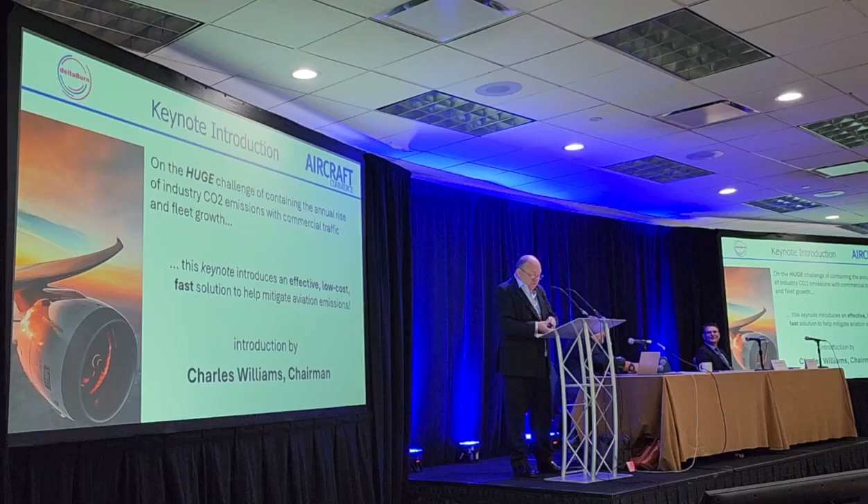I'll start off by saying the industry has a huge challenge ahead of it. As you're all aware, the industry continues to grow each year in proportion with the economy. The exception to that, of course, is when we get a big recession or downturn due to something like COVID, but generally the industry always recovers from that and continues on its trajectory.

Each year IATA produces a report, in about June, summarising what happened in the previous year. That summary includes the number of passengers boarded on commercial flights, the number of commercial flights performed, the fuel consumed, and consequently the CO2 produced.

If you look at the historical data that IATA produces, you'll see the average compound annual growth rate between 2004 and 2019 averages about 4.65%, which means it only takes 15 years for traffic, or passenger numbers, to more than double. And of course, with that, you get an increase in the size of the fleet, and an increase in the quantity of fuel consumed.

Just to summarise, in 2019 the industry consumed 96 billion gallons of kerosene, but that rose to 99 billion gallons in 2024, having recovered from COVID. For this year, the whole year is forecast to be 103 billion gallons, and of course that correlates to about 1.25 gigatons, or 1,229 million tons.

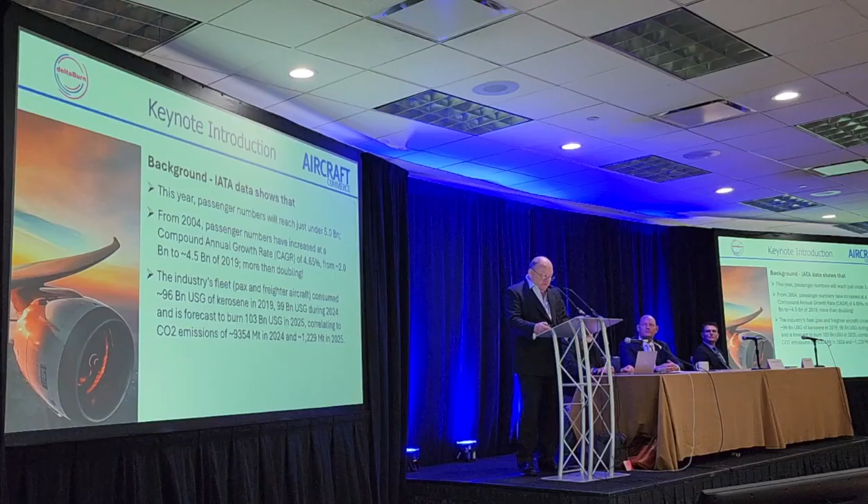Now, of course, the industry has to take its responsibility to get its CO2 emissions down. Under the Paris Accords, the industry's emissions are allowed to peak in 10 years' time, but then it's got to start declining again. The original target for 2050 was CO2 emissions of just 250 to 400 megatons, clearly a small fraction of what they are this year, and an even smaller fraction of what they're likely to be in 2035. However, in 2021, that target was changed to an absolute figure of zero, which many feel a bit cynical about being able to achieve.

The point here is, though, that the larger the peak we reach in 2035, the larger the annual reduction has to be each year for the next 15 years to 2050.

As I was saying, we have a conflict because already historically, since the industry began really in 1945-46, passenger numbers increase exponentially, as does the fuel consumed, as does the CO2 emissions emitted. Although we have had a continuous improvement in fuel burn efficiency because of the steady, continual modernisation of aircraft and the overall fleet.

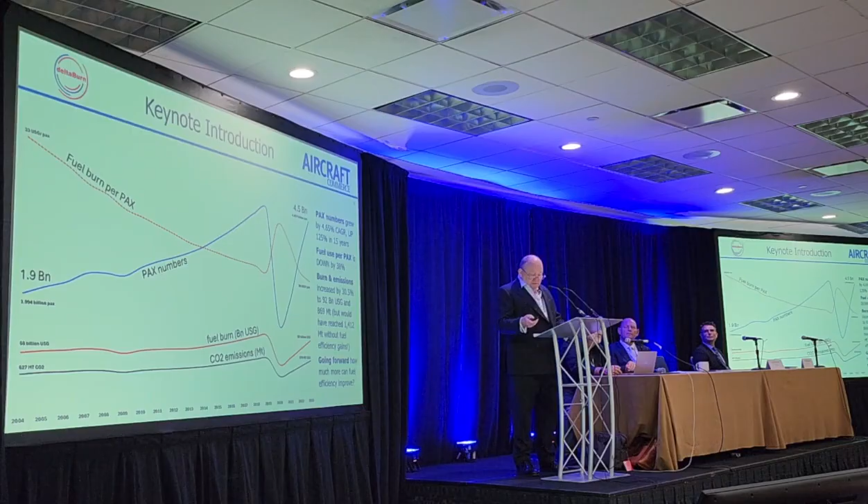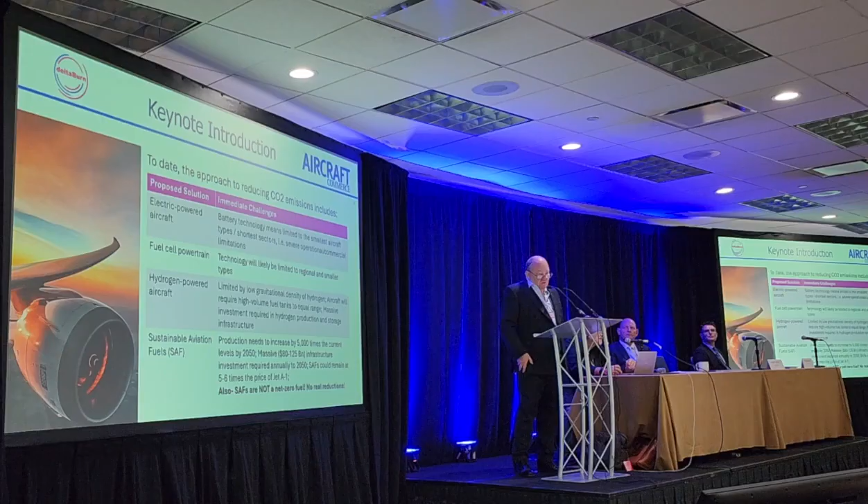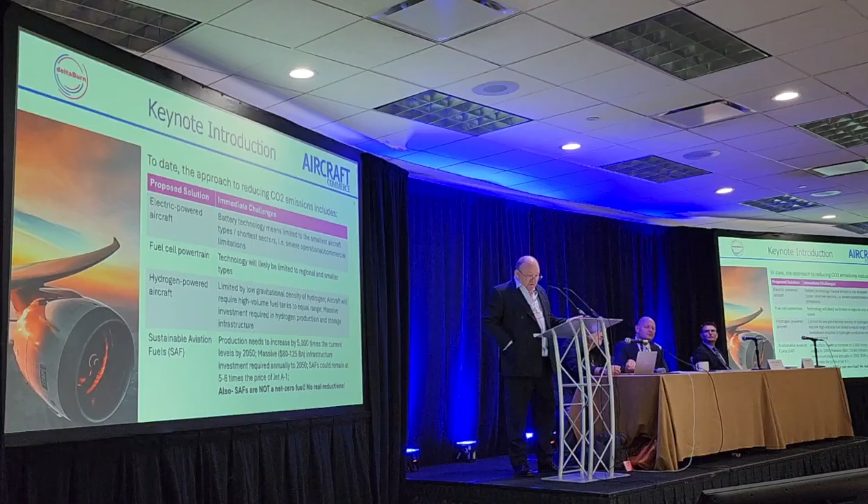Over the last 10 years, I've been at various conferences, spoken to lots of people, read lots of articles. There are all sorts of technologies that have been proposed to find an alternative fuel or propulsion system, or both. People talk about electric-powered aircraft, fuel cell powertrains, hydrogen, and so on. As time progresses, it seems more and more likely that the big winner is going to be sustainable aviation fuels. That seems to be the only real plausible option at the moment for passenger aircraft at 150 seats or bigger.

The problem is, of course, the production of SAF is starting from a very small base. As of 2 years ago, projections were that current 2023 levels of production would have to be increased by 5,000 times to meet the demand the industry would have for the entire fleet in 2050. That in turn requires up to $125 billion of investment in infrastructure to build all these different SAF plants, and then there's still the issue of source material and what the end fuel would cost compared to current Jet A1.

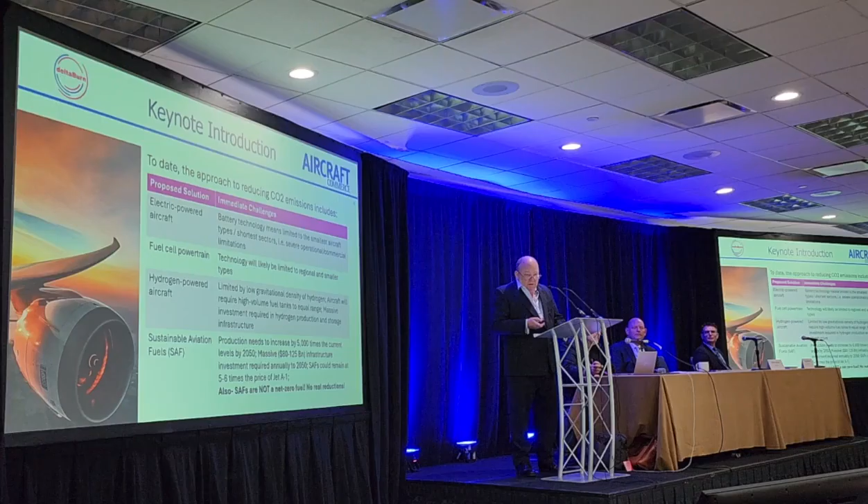Another factor, of course, is that not all SAFs are net zero anyway. So there are a lot of big question marks over reaching these targets by 2050.

So that brings us to deltaBurn, which Sander de Moor is going to go into a lot more detail on when I finish this slide. deltaBurn is providing a very simple technology via modification for current generation engines, which significantly reduces fuel burn and other cash DOCs. It also enhances the aircraft's operating performance and revenue generating capacity, and it can be applied to the aircraft in a very short time. It can be applied to all types of conventional propulsion, propellers and turbofan engine blades alike. It's also fuel type agnostic.

So Sander is now going to explain in far more detail the deltaBurn project. Sander.

So, you want to introduce yourself, Sander, or I can do it?

If you look in the notes on the website, it's very interesting. Sander de Moor is an investor, board member and general management of deltaBurn, a Singapore-based company. Sander brings, apart from a very big personality and lots of fun, 4 decades of flight operations support with roles across many aero company profiles, areas of operation, climates and cultures, and in most areas of flight and ground operations. So the last 2 decades brought all of that together in deep airline fuel and operational efficiency expertise. So Sander is managing this exciting startup, which he's about to tell you about, with significant fuel burn reductions and emissions improvements. So Sander, over to you.

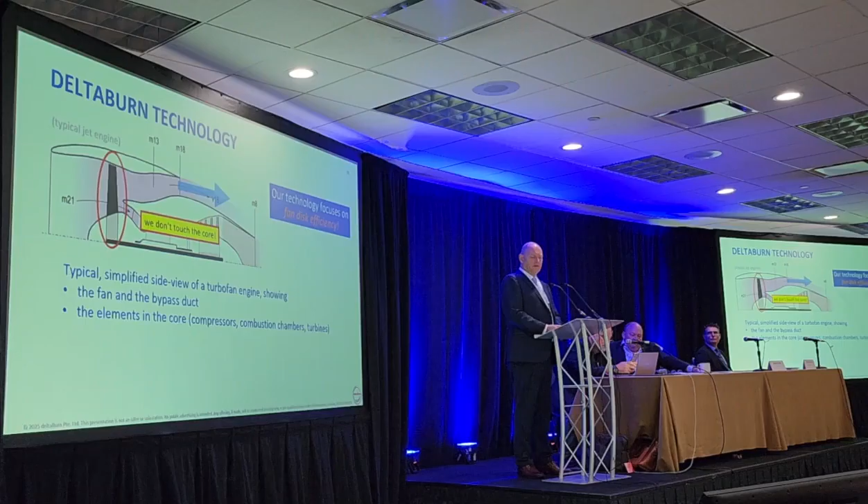Our technology purely focuses on the fan disc itself, the propulsion disc. So we increase the efficiency of that disc. Now, how we do that is still a little bit under wraps, but what we do is we drastically change the airflow around the fan blades. And in doing so, we create some really interesting secondary effects, which result in much more mass flow through the bypass duct and a lot more exhaust velocity. And this is signified by the larger blue arrow.

Now what that means is, because we have more mass flow and more exhaust velocity, because we changed the fan, we have a lot more thrust. So now your 32,000 pound engine is producing a lot more thrust, which on the face of it is a great idea, except the bearings in the engine don't like it that much, and possibly the engine pylons don't like it that much if you start to pull a lot more.

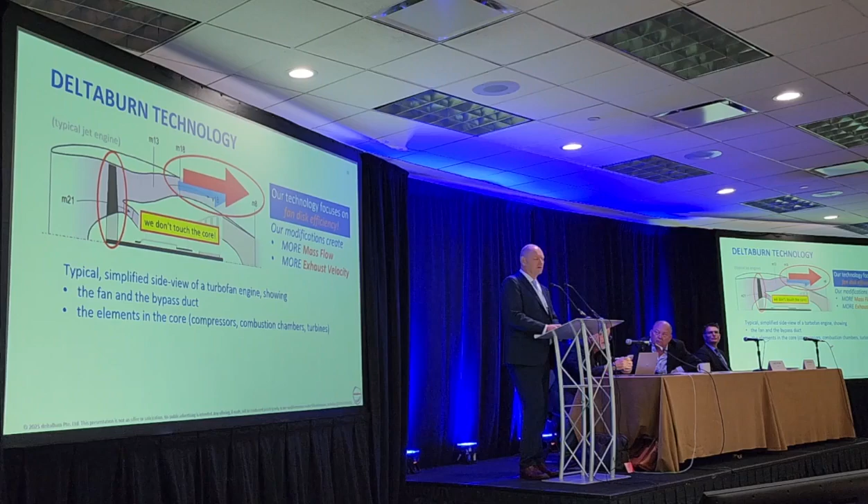So what this actually means is, if you power back a bit, you can actually fly with the same thrust, but now at a lot lower fuel burn. And that's actually what we're doing. That's the trick. We make the fan more efficient, we get more bypass flow, and because of that we can bring the power back and get the same thrust with less fuel burn. Now, there is a whole string of benefits attached to this.

We have permanently derated engines, much lower operating temperatures. On a typical flight we see 100 degrees less EGT, much lower stresses in your engines, much lower fuel burn, which we will come to see, less noise, takeoff and landing. And there are much higher safety margins because that extra thrust, if you want it to be available in a single engine situation just after takeoff or just before landing, the flight crew will have that extra thrust available. So it increases safety margins in that particular respect, but also during normal operations, because the engine isn't stressed as much as it normally is.

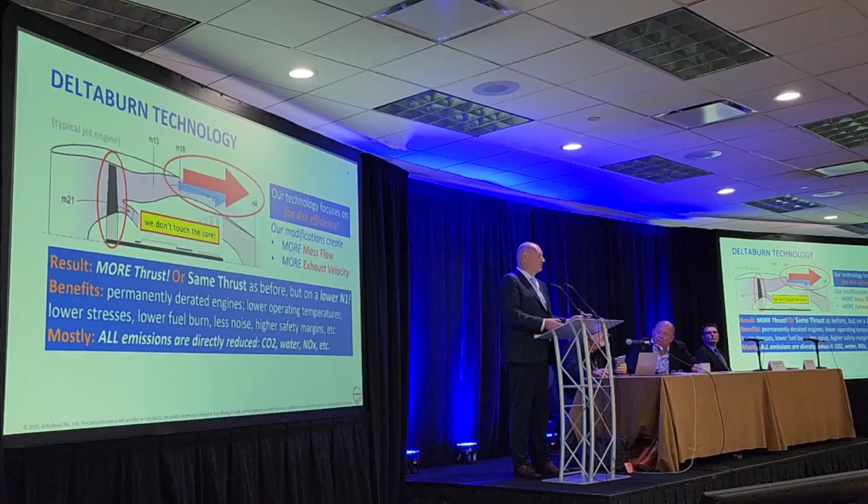But the biggest thing is this: when we reduce fuel burn by so much, we reduce the emissions by so much as well. And not just the CO2, but because we run less fuel, we also produce less water, which means less contrails, which is also a topic of interest today. Our NOx is cut by around 50% because we run the engines at lower temperatures. So there are a whole string of benefits.

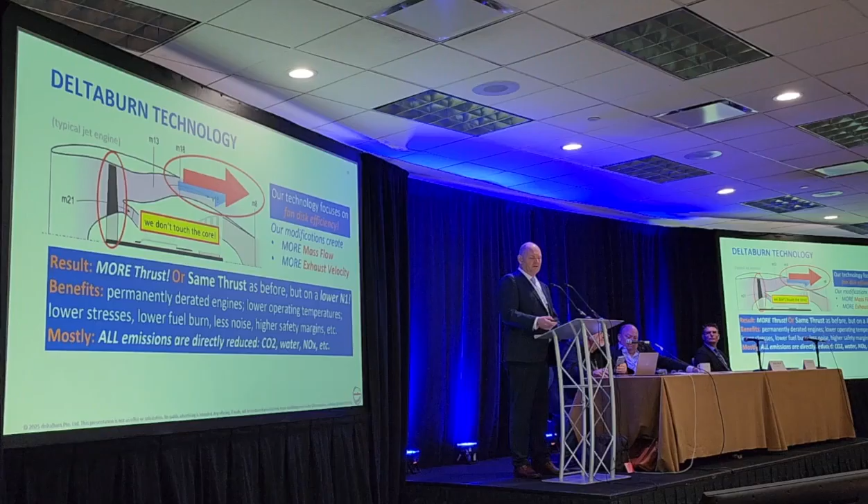Now, magic. Nope. We call it real science, and the patent office seems to agree. We have flight tested this many times, we have demonstrated this many times, and I will show you a demonstration in just a few seconds.

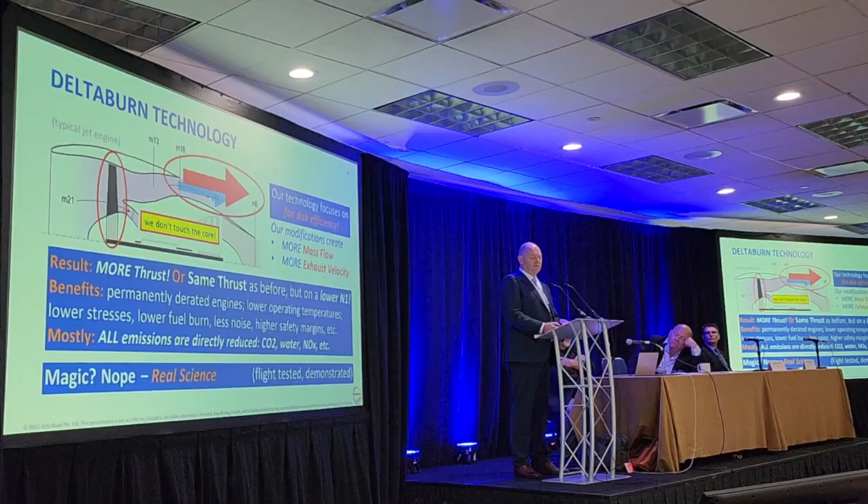We see over 50% more thrust at altitude and at speed. And that's about the same amount of thrust that you really lose after takeoff. An engine, actually a jet engine with the fixed blade propeller at the front, where the fan is, loses about 50% of thrust all the way up to flight level. And we basically give a lot of that back.

What I'm going to show you is a 737 clip. We modified one engine on this aircraft, the left engine. And what you're going to see is a takeoff.

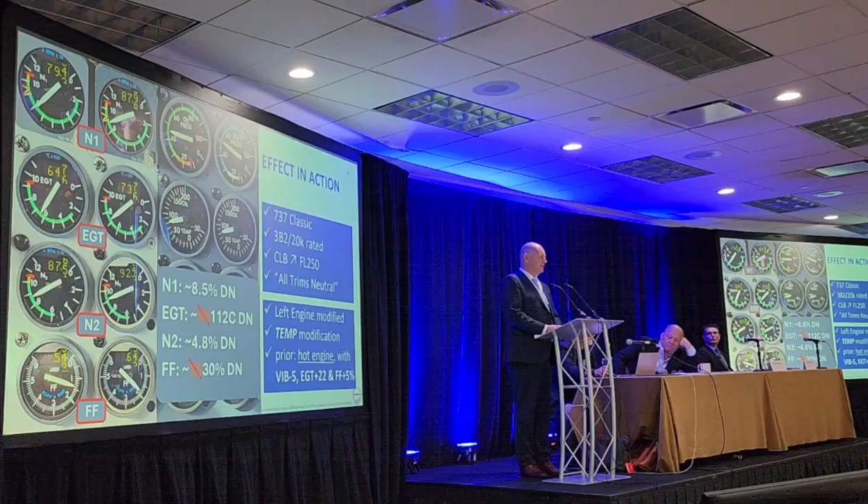Yeah, two-generational leap. The other thing I mentioned earlier was the 50% increase in range, which is an effect of a much lower fuel burn. Now, how does that translate to a real-world situation?

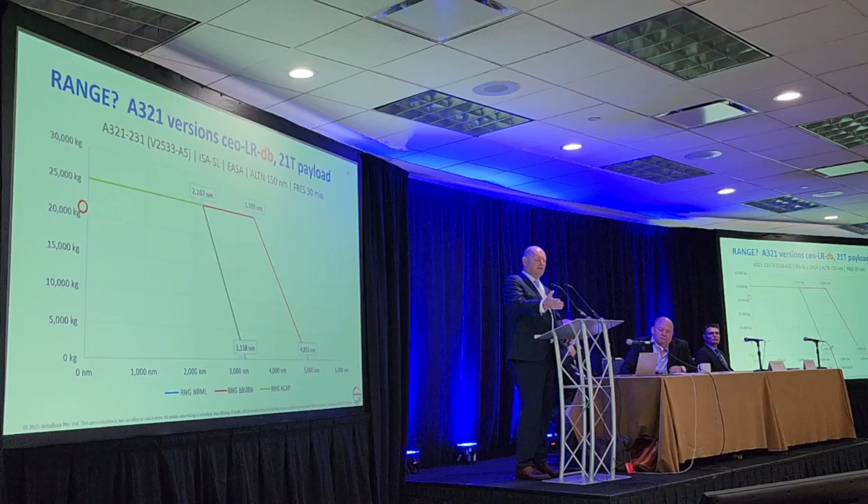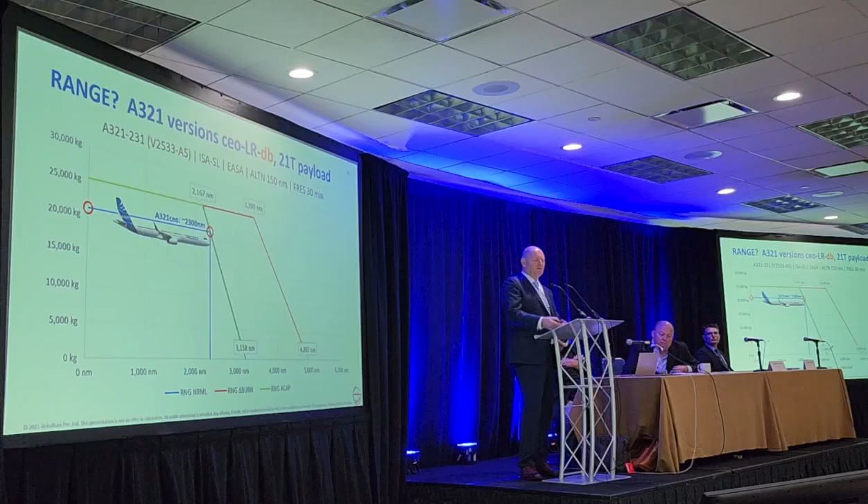Let's say we have a classic A321 CEO. That airplane has a range of around 2,300 miles if you take a 21-ton payload. If you modify that aircraft with our modifications, you get an airplane that does over 50% more, which is 3,600 miles. Now that becomes a very interesting airplane because it's only 10% away from the current range of the 321 long range, right? So with a very easy change to the aircraft, you create an airplane that is doing magic.

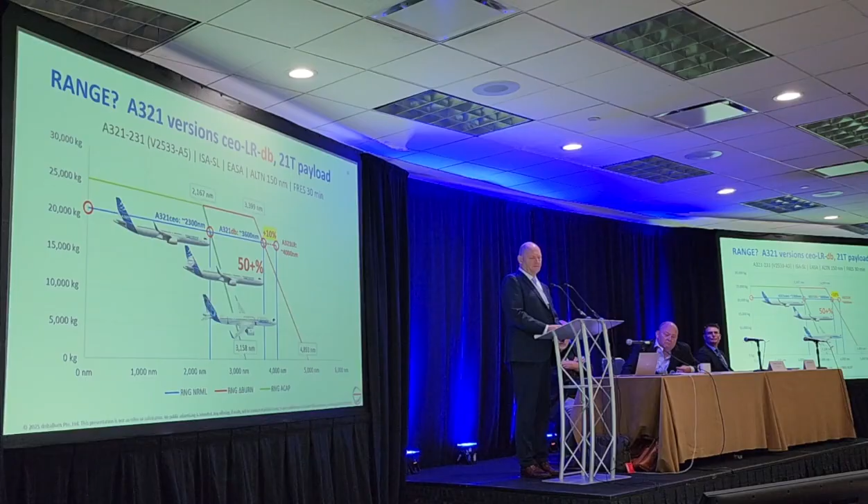Taking that same line of thinking a little bit further, if you look at the typical A380, burning, as we know, a lot of gas, doing around 4,500 hours a year, maybe even 5,000 hours. For the example, it doesn't really matter that much. And that fuel burn could be 12.5 tons, it could be 12 tons. It depends on how the aircraft is used with that fuel price.

Then operating that one airplane per year will set you back around $39-40 million. And it will produce 170,000 tons of CO2. Now,

Put the aircraft in an A-check, because what we do to the engine can be done within an A-check. And now we have four adjusted engines, and we have a thing called the deltaBurn effect, which is a third reduction in fuel, a third reduction in cost, and all the other benefits that we talked about before. Now, if I were one of the owners of this aircraft, I would maybe pay attention. In addition, all the other effects that we just talked about.

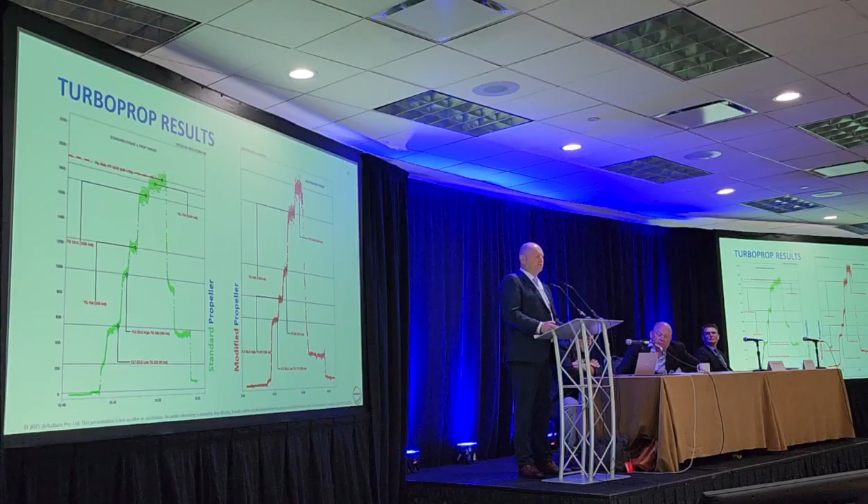So left image is unmodified, right image is modified. And the thing that jumps out automatically is that the right engine is doing much better. On this particular day, we reached a maximum thrust of 1,860 pounds on the particular combination at a torque of 1908 foot-pounds.

The modified engine reached that same thrust at a much, much lower torque of only 1,044 foot-pounds because of the modifications on the propeller.

Pushing it all the way up to maximum power, the maximum we achieved was 2,260 pounds, but only at 1,500 foot-pounds. So still much, much less than what the left engine needed to squeeze to get to that thrust.

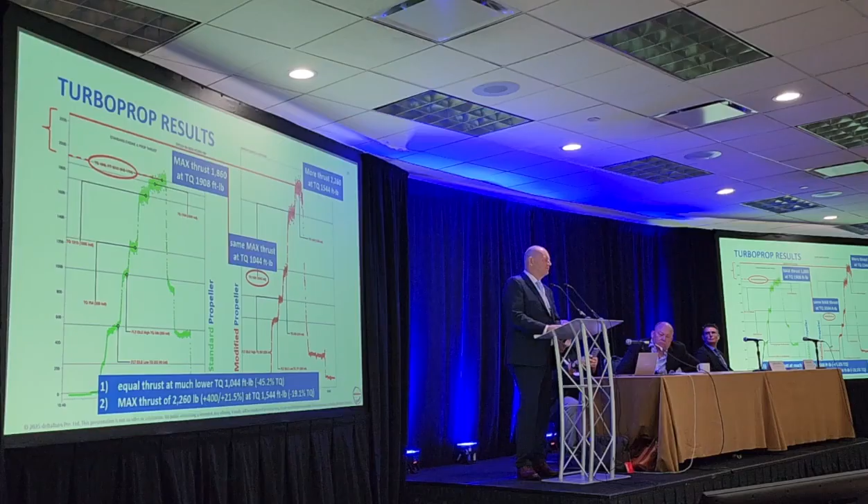So the equal thrust condition that we reach on this aircraft, we reach it at 45% less torque. Now that is a number that nobody would believe unless they saw it with their own eyes. The other thing is the maximum thrust is 21% more than the standard engine, but still at almost 20% less torque.

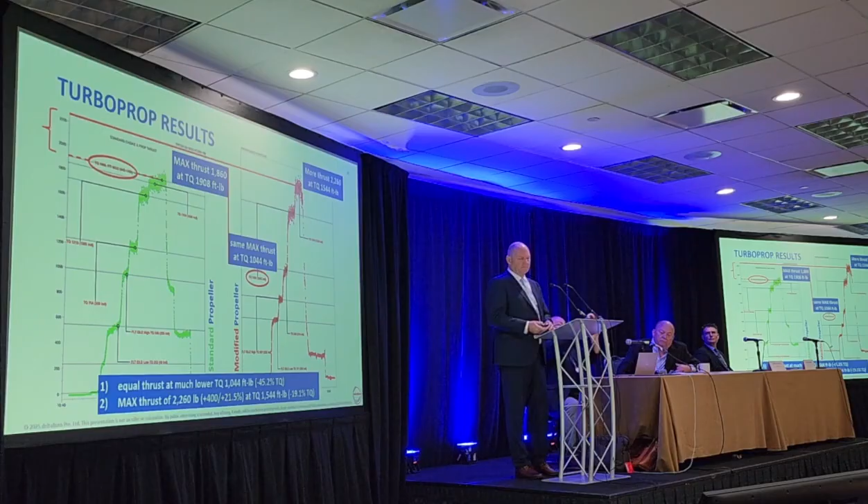So how does it all come together for a roadmap? As we said, we're doing the internally funded STC at this time. We hope to bring this STC to market in the first quarter of next year. Doing that, we'll put the fan STC, the first one, within reach, because out of that first STC, we hope to generate the revenues to be able to go to the market and buy that little airplane and do the STC. Unless, of course, something else happens.

Unless, of course, an airline says, hey, you can use our airplane. Or, hey, here's a bag of money. But until that time, we have to do it this way. We will get there eventually. I mean, I have been on too many test flights to ignore this. I cannot say that it doesn't exist. And once you see this, you cannot unsee this, right? So we will get there. What we'd like to do is get there much faster than our current roadmap, because the world will just have to wait 1-2 more years until we're ready, right?

It's about 9 months for the first STC for the jets, because every authority, FAA, EASA, they don't really like you playing with engines, major parts of the airplane. They really want to see that everything is done right. But subsequent STCs will go faster. We're targeting about 50 STCs, 50 airframe engine combinations, and then at the end of that, after about 5 years, we hope to have modified each and every airplane on this planet. Right?

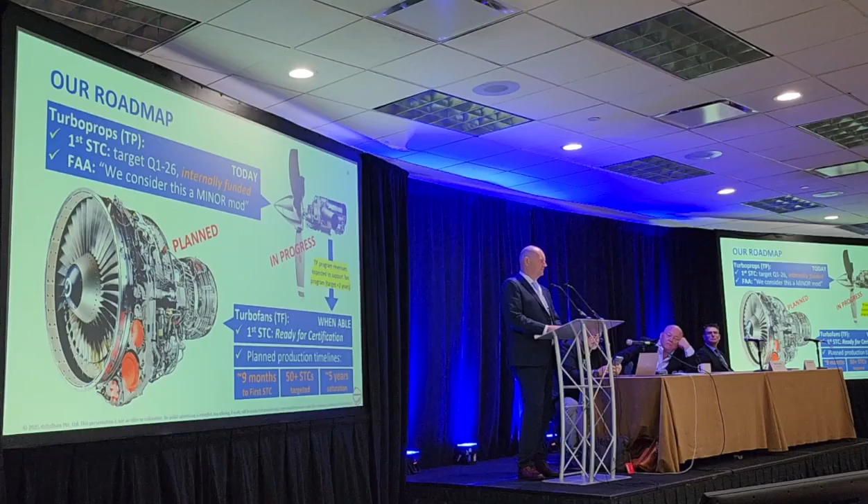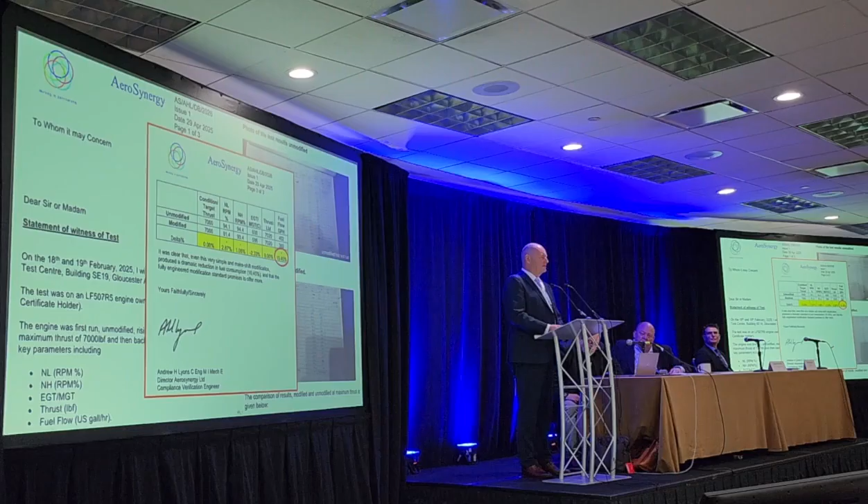So on this particular test, after our modification work, which took about an hour, we reached 10.45%. For us, that was a real disappointment because it's not what we're used to seeing. But for the Rolls-Royce gentleman and the other engineer, they fell off their chairs. They had never seen anything like this, especially not from a modification that didn't take the billions Rolls-Royce just dumped into their latest engines to make it 1% better. This was done within an hour on an engine, and the results were right there. So even though we were disappointed with the setup and results, it's still a testament to the enormous potential of this technology.

Which is leading to the MOU for the first fan STC. We're in final negotiations right now with an operator to do the 146 STC with us, and this is a direct result of us working with that engine type certificate holder who made this call.

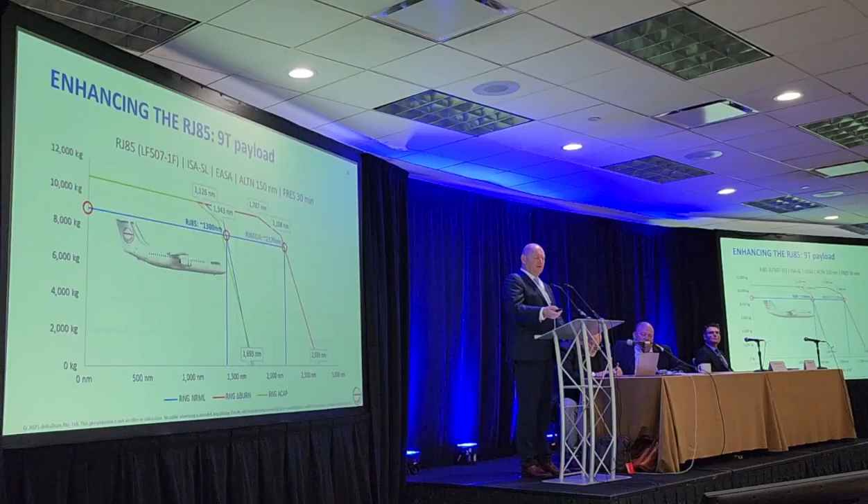For this particular operator, the big change we're going to make is actually twofold. They do a lot of tech stops today, flying in the Arctic on long-range operations, but this airplane isn't really suited for it. So we will give them a lot of direct flying. The other thing is safer operations, because our modifications make the engines turn slower, so there's less effect with icing, both on ground and in the air.

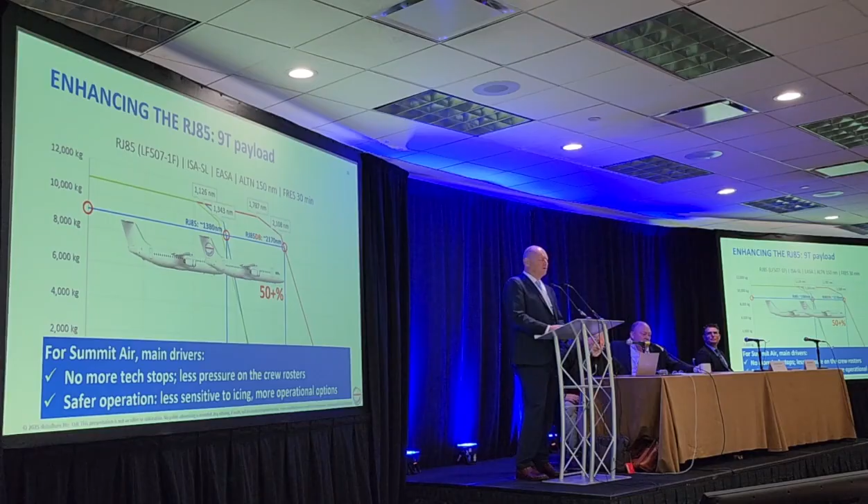So by now you can expect that we will bring this to market, and you might wonder how this is going to look to you, the operators. What's it going to look like? We will lease our STCs to you, operators. You don't have to put money up front, you don't have to buy the technology, we will lease it to you.

We will do invoicing from verified savings, just like you do with your fuel efficiency programs and your FOQA programs. You'll share some data with us, and based on that we will invoice you, out of your savings.

The product will be installed by us, and as I mentioned before, this fits within a standard A-check. The 737 flight you saw on screen, we modified that left engine in 38 minutes, taking 1 minute per blade, and then you get the results you saw. Now, that was a temporary modification, not designed to last, just there for the demo. The STC level product we put on has a life from C-check to C-check.

We also do the CAMO. Based on the data we get from your organization, we know how well the installations are performing. The design life is the C-check interval, or better. We don't know yet, we haven't tested it all the way to the end of the first C-check.